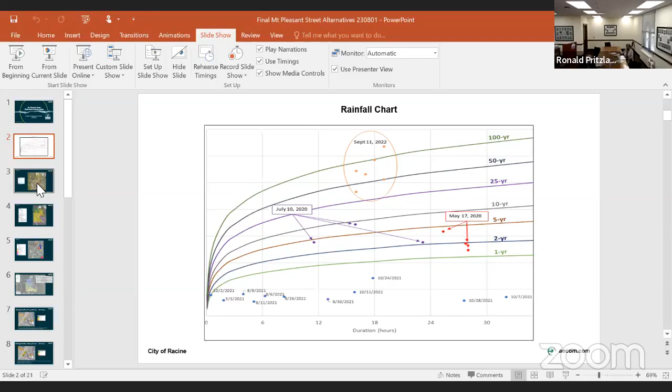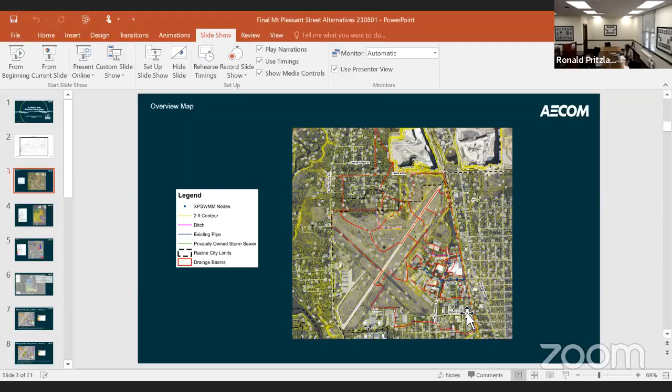So AECOM, we commissioned them to do a study. They're on call. They're our stormwater consulting engineers. They looked at this entire drainage shed over here that essentially feeds into this area where I'm pointing on the cursor. Great Northern is right there. It's that big white building, and our collection system kind of terminates up here. It collects water in this drainage shed over here, and eventually brings it down and puts it in the retention basin that we have just north of Laird Avenue and west of the railroad tracks.

So we had them analyze it. They basically looked at the various land uses. Based on the land uses and topography, we can determine what type of runoff characteristics it's going to have, and we can model it for various storm events.

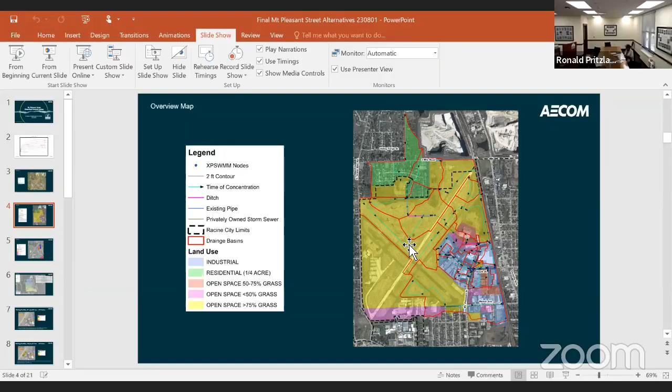These are some of the significant areas over there. Again, here's the Young Court Detention Pond over here, just north of Laird Avenue, just west of the tracks. GNC shown in yellow. SC Johnson Hangar is shown in orange. This is where the proposed youth correctional facility is going in by Racine County. We did model that in its completed condition to make sure we got the runoff calculations correct.

So essentially what you see here is kind of significant areas in here. A lot of the water that comes through this comes into Caledonia, goes through the Sundance Channel, goes into a private collection system owned and maintained by the airport. It helps, obviously, drain the runways and the taxiways. Then it makes its way over into a drainage easement that eventually comes into the city's north terminus of their collection system right in this area.

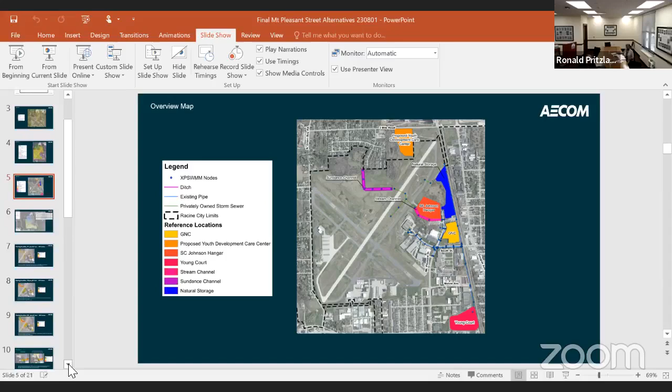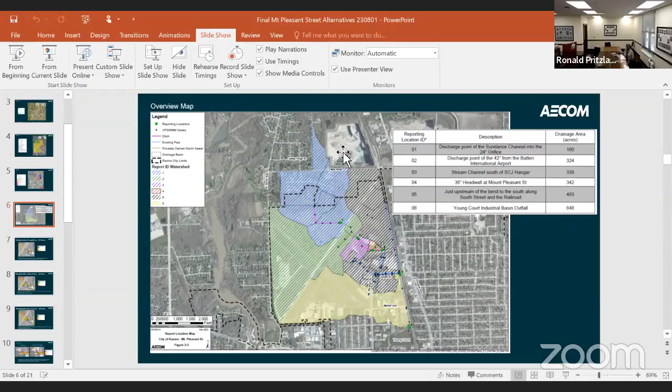Moving this along here. Again, we hatched out the various drainage basins in here, applied those drainage basins to that type of land characteristic with the topography and how much impervious area or grass area, and did all those calculations. It's a pretty significant drainage area. When you cumulatively add up all these locations that get out to Young Court, we're talking nearly 650 acres of land flow through this area and eventually get to Young Court.

So we wound up modeling that runoff coming through the airport property. And we model it for a 10-year, a 25-year, and a 100-year, 24-hour event. So just to give you an idea of what the modeling looks like, this is a snapshot in close. Again, here's GNC, here's the SC Johnson hangar. Here's one of the airport runways. That's runway 04-22, and there's a parallel taxiway to it.

When we modeled a 10-year, 24-hour event, which is about 3.7 inches over that time period, this is the kind of flooding that we would expect to see in the model. These are basically heat diagrams, if you will, that show you where the flooding occurs and to what depth. This is all modeled through software based on the topography out there and our collection system. As you can see, in this area of their building, there is flooding that occurs in that 10-year event. It comes out in the street and gets fairly deep.

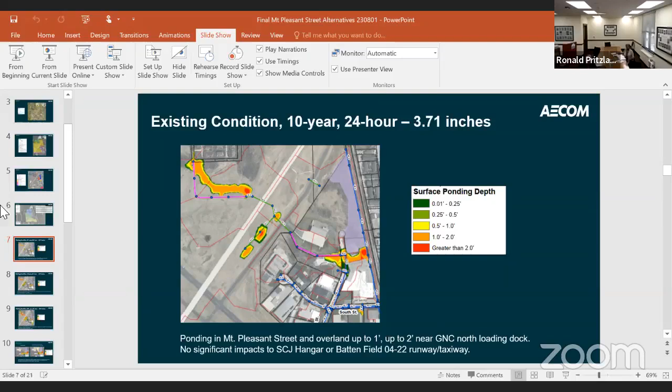It goes through some of their loading docks. That's where they've had some of the water that came in the building and caused quite a bit of the damage. So we looked at several storm events to see what was going on there. We then ran it through a 25-year, 24-hour, that's about 4.5 inches of water over that 24-hour period. Again, you see how the flooding occurs, and this is where it hits this bottleneck here and creates some of this flooding in that area.

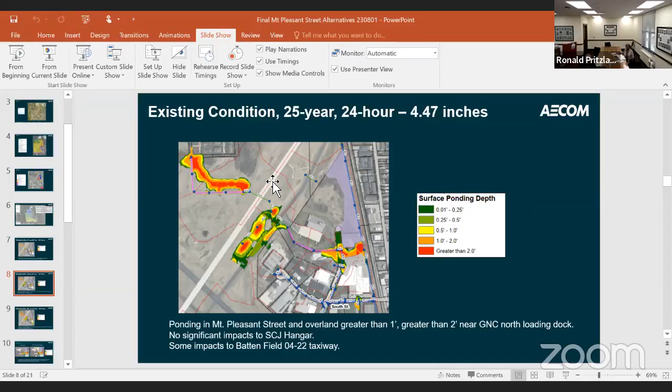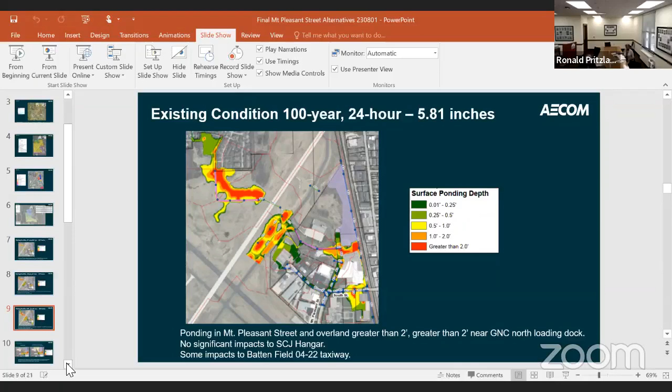It also shows how water backs up in the Sundance Channel. It's meant to do that. Water backs up between the runway and the taxiway. It's meant to do that. Clearly, the runway's unimpacted, so if a plane had to land in the storm, it certainly can do that. It's not flooded. We then ran the 100-year event through there. That's about 5.8 inches. And you can see the problem gets worse and worse. Now, we're not obligated to design anything greater than that 10-year event, but we wanted to model it to show you what was going on in those various events.

So let me move along here real quickly. What we did is we looked at a couple different alternatives, trying to see what we could do to mitigate this during the 10-year event. This line that comes out of the north terminus and into this drainage ditch is a 36-inch.

So we looked at doing various things. We modeled it if we had put a 48-inch diameter pipe in here to take the water in, and that is the same size piping that comes down Mount Pleasant Street and eventually makes its way over to South Street, where the pipe sizes increase progressively to take on more drainage areas. It didn't really help the situation. You can see even in the modeling, we're still getting some of that flooding on the right here.

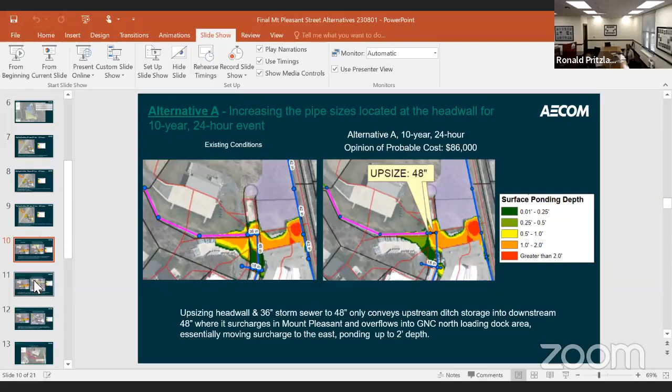We looked at another alternative where we could upsize again that pipe that receives that water from that drainage ditch and upsize that pipe as well, different sizes all the way down to South Street. Let me go back one second. This alternative costs about $86,000. I forgot to mention that.

This alternative is much more expensive. It exceeds over $1 million. Even with this upsizing here, it reduced some of the flooding around GNC, but not to the level that would keep them from getting water in their facility. Again, this is for a 10-year, 24-hour event.

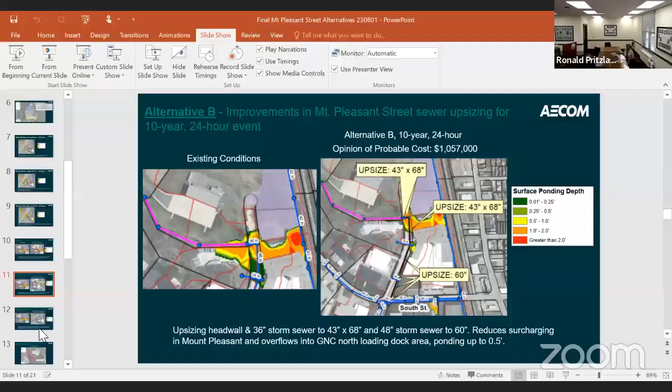We then looked at another alternative, C: what if we expanded this ditch that is in here and created a detention facility, essentially an area where the stormwater can back up and fill up. It would be a dry basin. So essentially what this model does, and I'll show you on the next slide, is we dig out a dry pond here. This is kind of like the contours of that proposed pond, the shape of it more or less.

We then put in a pipe at the bottom of that. That drains flow out normally. It goes through essentially a weir that we would build over the top of the pipe, and then it drains down. We regrade this ditch, clean it out. It would go into our existing collection system. What happens when it starts to back up, it fills up the dry pond, then it dumps over the weir, and then it goes right back in the same collection system. So this pipe that we put in here is forcing it to back up.

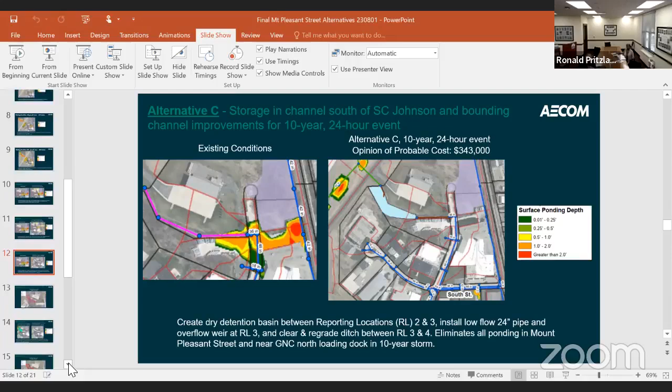In that scenario, that cost was about $350,000. When we ran that through the model, it essentially dries up this area in a 10-year event. So it looks like it's achieving what we wanted to do. Simply doing changes to the piping system didn't do it, for a whole host of hydraulic reasons. I'm not going to get into all the detail of fluid mechanics and the hydroscience of collection systems. So that was option C. This is just under 2 acres of storage that can be provided. So that's where we arrived.

We did look at different scenarios, like could we over-engineer this to provide a greater level of protection? This was for a 25-year event. This is how large we would have to create the dry detention area. Even when we modeled it, they still get some flooding in this area north of GNC. It's quite expansive. It really starts to encroach onto SCJ's property. This is their corporate hangar here. This property here is owned by GNC. This property north of this ditch is owned by SCJ. So that was a little bit intrusive. Again, that project was still north of $1 million, roughly.

So then we looked at, what if we just try to maximize what we can get in this area here? It would handle the 10-year, 24-hour event, which we're obligated to provide for, but it provides some level of protection above that. So it's less than the 25-year, but greater than the 10-year event. So we can put storage in there. We modeled it again and didn't have any significant issues with flooding over there in that scenario. Again, this is running a 10-year event through there.

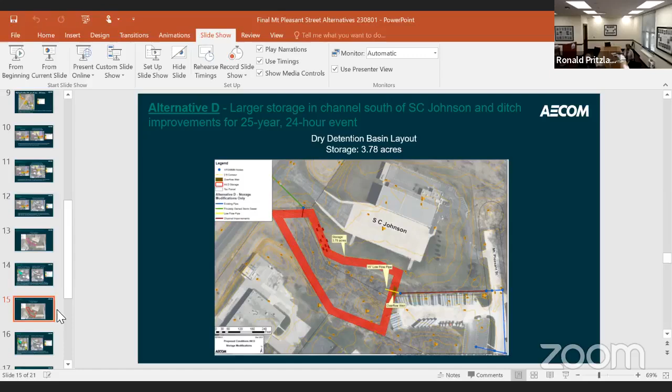Say we get a 15-year event storm in here. It still may do the trick, but once we get to a certain level, it will start to come out in this location. However, let me emphasize, we're only required to design for the 10-year, 24-hour event. This scenario costs about $580,000 because the grading's a little more significant. So this would be the size of alternative D. That's for a large 25-year event here. We looked at that in more detail.

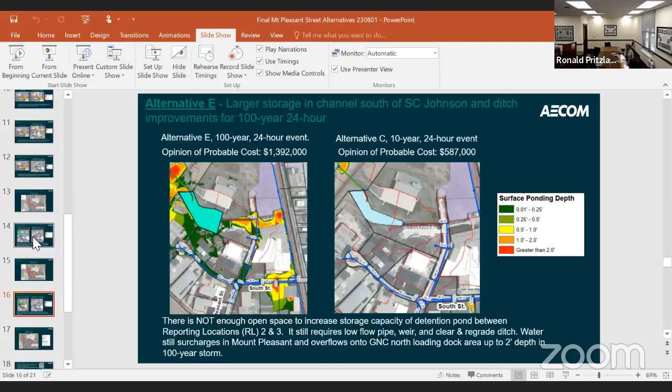We even modeled a 100-year storm through here and tried to maximize that pond area. When we ran that through, it still floods. A 100-year event, nothing is designed for that. So that obviously is not a logical choice, nor is the 25-year event that we modeled, because it still floods there as well. So we looked at maximizing the size of that, and that gets us to a dry pond that would cost about $580,000 to design and build in that area.

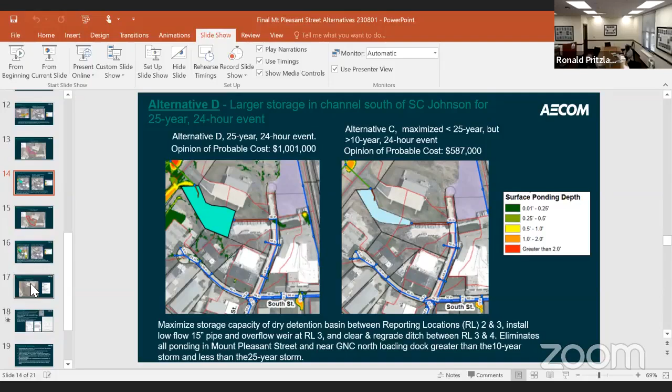This would be for that 100-year event. Again, it doesn't solve the flooding problems. It gets to be very large. It really starts to encroach on SCJ's property. You can see this dark line in here kind of is the property line that you can see right in here. SC Johnson has no issues when it comes to flooding in this area, generally because their property is built quite high related to the surrounding topography, where GNC's is actually built quite low. So they're willing to work with the city and GNC, but they don't want an overly excessive grading project affecting their property, which we understand.

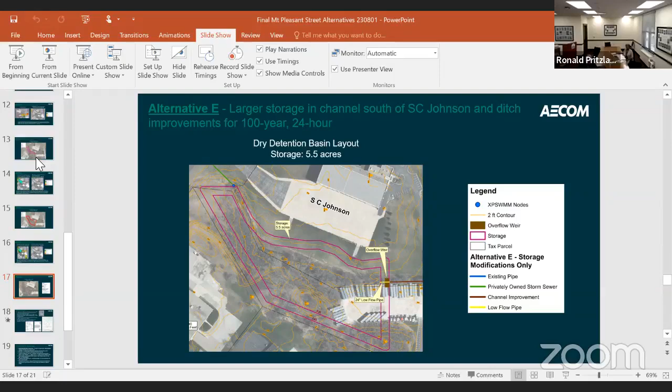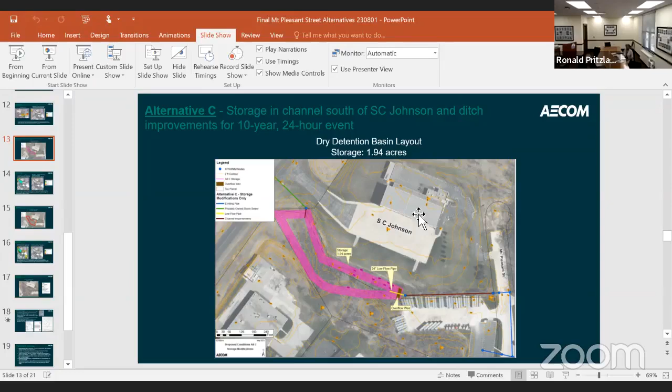So that being said, we zeroed in on a pond design that was, again, greater than 10-year, less than 25, maximizing it, but trying to keep as much of it to the south and to the west as possible as the least impact to SCJ's property. So the footprint for that winds up being, let me see here, more in this area. We keep it kind of as far south as we can, as like I said, as to not encroach on private property to the south and keep it off SCJ's property.

So what we did, in the meantime, while this study was going on, we had some recommendations. We changed out that head wall that was on that 36-inch that water comes through that ditch on, put a better trash rack on it to keep it from getting clogged. We've had rain events this summer. It's done a fantastic job, so that has helped.

We've also discovered that here is the SCJ property, here is the GNC property. This was once a parent tract here. It was divided by a certified survey map, and this part here was then deeded over to Great Northern Corporation, and that's where they kind of have some of their trailers that they store, if you saw them from the aerial photography. And then what was developed on that dividing line was an easement,

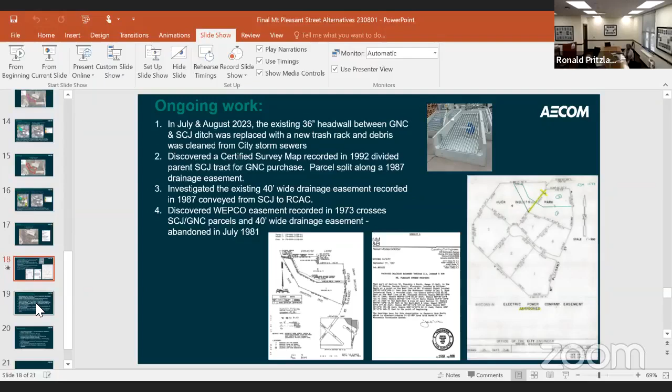So essentially what we came down to, in our preliminary findings, was let's try to figure out a way to maximize alternative C, which addresses the 10-year, 24-hour event with additional storage, but it's less than the 25-year event. In alternative C, we require interest in the property owned by GNC and SCJ. Brian from the city attorney's office is here. He'll be talking about this on the next agenda item. We would acquire that land in permanent easement. The city would, for that new dry retention pond and this new drainage facility.

We probably wind up transferring that 40-foot wide, non-exclusive permanent easement to the city. Right now, the way it's written is SCJ is the first party, and the second party is RCAC, which used to be Racine Commercial Airport Corporation, now Batten Field. Ultimately, the city would maintain this newly created dry retention area, the low flow pipe, the weir, and the channel. The design, again, would provide that level of protection above the 10-year, but below the 25-year.

Since neither GNC or SCJ or even Batten Field would maintain this, none of these private properties would receive any stormwater utility credits. If they had a facility on their own property, that would reduce their annual stormwater fees. None of them are interested in doing that. So no one would get any credits. They'd still pay their regular rate, the City of Racine stormwater fees, but we would wind up maintaining it as a regional facility, and that would be part of our stormwater utility budget moving forward.

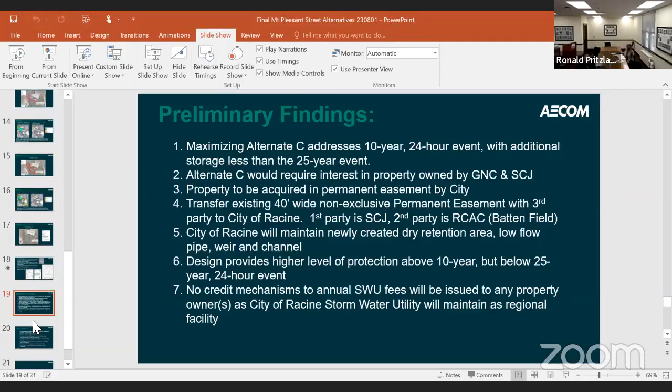So some of our next steps: we believe alternate C, the maximum one, is the design that we'd like to mitigate some of the problems over there. Obviously, we need to prepare estimates for that. We have provided some estimates for this. They are in the 2024 CIP as well for construction. We've got to procure detention design and survey services.

That's what's before you on this agenda item tonight, along with services for topography, some title searches, legal descriptions of new and perhaps temporary easements that we may need to acquire. And then, that property acquisition for these permanent easements would have to be executed by the city attorney. Again, Brian is here to speak on that next. And then Department of Public Works, if this item is approved for the design work to AECOM, once those plans and specs are prepared, Ron and I will get that advertised for bidding later this year.

Hopefully open up those bids in early 2024, and we could begin construction on this in early next spring, complete next year as well. And then again, like I said, we would assume maintenance on this in perpetuity. And that's it. So that is kind of like the slides that we used when we met with Batten Field, SCJ, and GNC. Those are the slides I wanted to share with you, so you have some context as to what this professional service agreement is for.